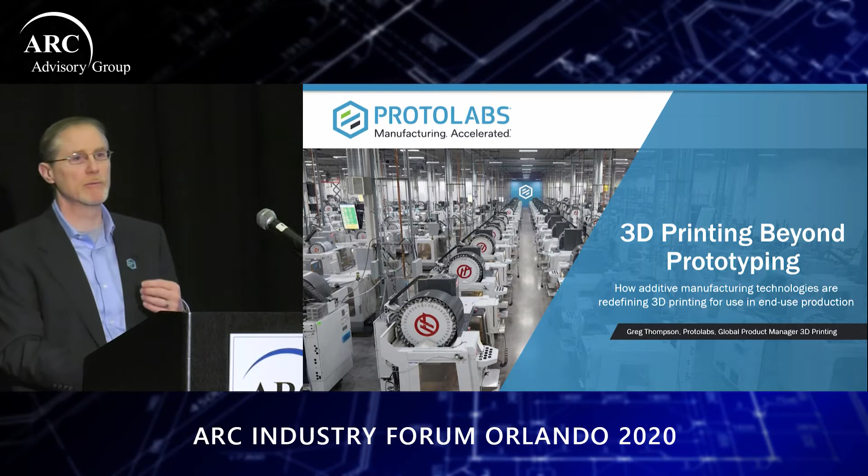We engage a lot around which manufacturing technology is best for those customers' parts and projects at the time. But I think we have to acknowledge that those decisions are not getting made in a vacuum. There are a lot of factors and trends that are impacting product development today.

First and foremost is just the sheer pace of new products and introductions that are required. The days of products generating profit as a cash cow for years to decades on end are quickly coming to an end. I would imagine, Brian, you're seeing this in the aviation industry, autos facing this. The life cycle of products is just shrinking.

And the new products that are coming in their stead are being demanded by customers to be far more personalized and far more customized. So we're getting more products that are required, and they're more complex. And those products themselves and the equipment that they're made on are more and more connected.

It has to change. It has to be more efficient. It has to be faster. It has to enable you to get your products to market much quicker, because the window of opportunity to take advantage of that revenue stream is ever shrinking.

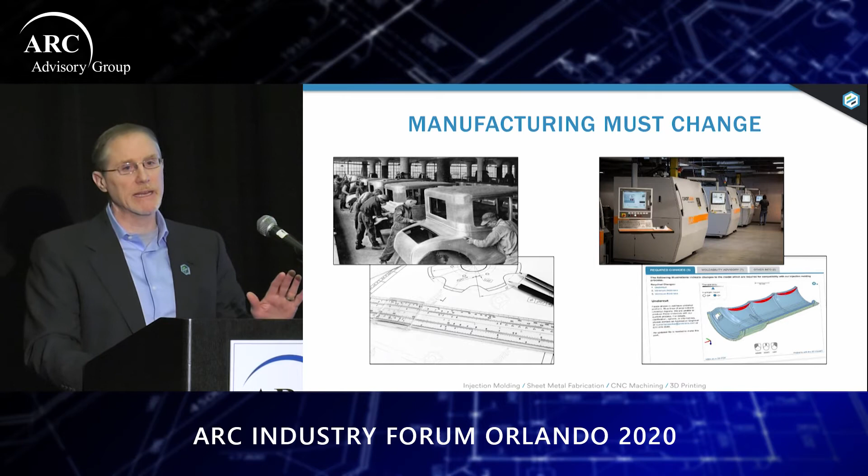And so the natural question is, well, is 3D printing, is additive ready for prime time? Is it ready for production? I think in answering that, we have to step back and talk about where additive is in its journey to industrialization. So let's start with reminding ourselves of the injection molding story.

Injection molding comes on the scene in the late 1800s. And its first materials were actually celluloid. It's used in combs, and then it evolves to records, but it remains really niche.

And then in the early 1900s, we start seeing lab-synthesized plastics. We see additives. Some of the materials that we're familiar with today, polyethylene, nylon, they come on board. And we see the first screw extrusion machine come on board. And then World War II happens, and there's a massive spike in demand.

And then from that point on, there's no looking back. By the 1980s, plastics overtakes metals, and today it's this near $300 billion behemoth that we know and work with today. And so it's important to understand that, because it took a combination of machine, material, and application to really create that tipping point.

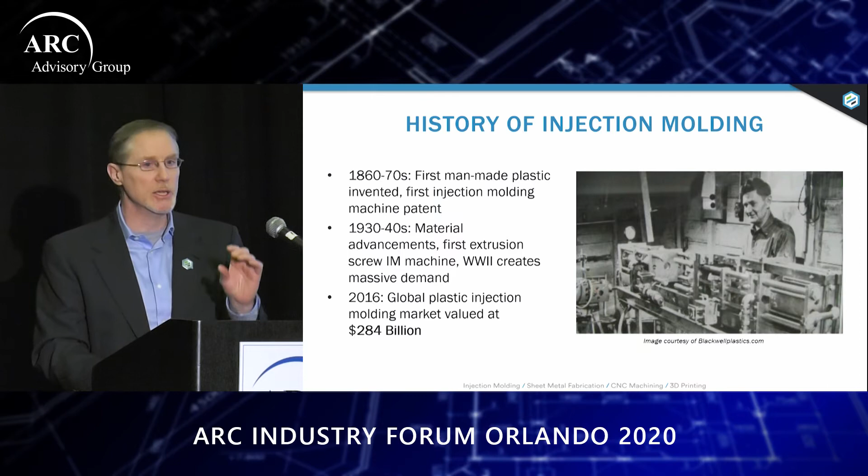And as we all know, additive is on that journey today. So, you could argue - we did some research - that the first application of a laminate-based technology we found was actually map making way back in the early 1800s. They would glue successive layers of elevation together and you get kind of a 3D representation of the topography. So that's a fun fact, okay?

But we can't even begin to talk about the industrialization of additive until the 1980s. I think both Brian and Andy referenced this - that's when the patents of all the technologies that we know today came into play. So all of FDM, stereolithography, all the systems that Will was talking about, those start in the 1980s. And they've been the bedrock of growth that have built the industry over the last 30 years.

But if you think about that, that's extremely young compared to where injection molding is and has been. Now, by no means am I arguing that it's another 20, 30, 40 years to the tipping point for additive. The world moves way too fast for that today.

The case in point, I think Andy referenced it, is early in the last decade, when the patents of FDM expire, and there's this explosion of the maker space. It did do a little bit of damage to the industry in terms of the Gartner hype cycle and how people think about it. But what it did do is drive an interest and drive a lot of engineers to explore how they could incorporate additive.

And they have. So the raw answer to, is additive viable for production? It's yes. Brian just showed you some applications. Additive is in use today. It's in airplanes, it's in homes, it's on manufacturing floors, it's in human bodies. But I think we in the industry would have to stand back and say, it's not as prevalent as it should or we would like it to be.

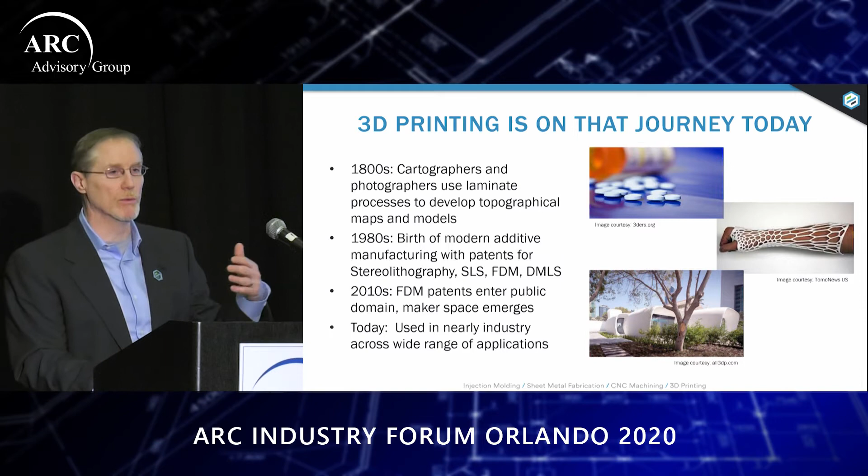That begs the question as to, well why? Let's follow the money. Because if we're talking about a choice of different manufacturing technologies to use, we're having an economic discussion, which offers the best business case and how you should think about it. A business case could either be an enhanced cost on a part-for-part basis, one has a cost advantage, or like you've seen in some of the examples before me, one technology may enable you to do something, a product, a system, or a process that you weren't able to do otherwise.

And you've seen from the case studies, and the spoiler alert, that's how you should be thinking about additive. It should be doing new and unique things for you. But let's unpack that again a little bit as to why. Let's start just with the cost structures of additive compared to some of the traditional manufacturing.

So this is a chart that's kind of shown in the additive world. I'm not sure how much in your worlds you've seen this, but if you look at this chart, along the x-axis, you start with quantity 1 on the left, and then high serial production all the way to the right, and the cost per part is the y-axis.

So let's talk about injection molding as a comparison here. What's beautiful about it is it's highly repeatable and efficient at scale. But it costs a lot of money to get into it. Once you design the part, you have to design the mold, you have to mill the mold, you have to polish the mold, you have to get it into your press, you have to set your temps and your pressures, and then and only then are you producing parts. But once you do, you're producing them at dollars or pennies per part.

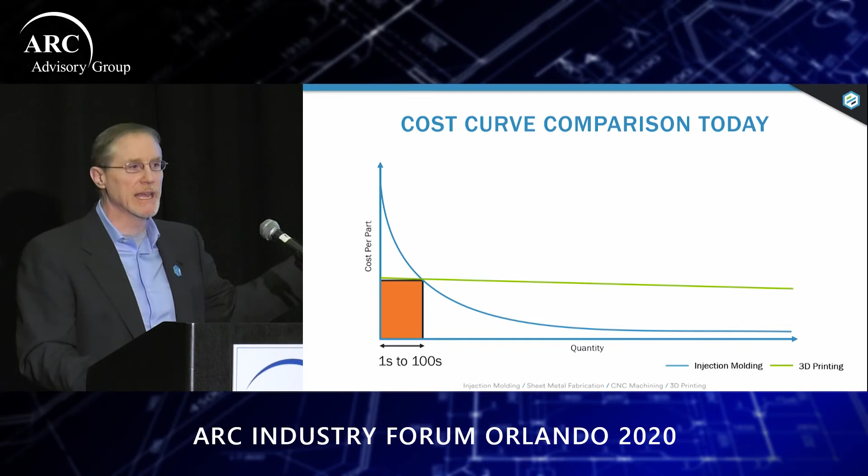So let's talk about that. Good news number 1 is ones to hundreds happens a hell of a lot in any product development life cycle. So certainly it happens in design and development, and that's where additive grew up. It grew up, it was called rapid prototyping for decades before it became additive, before it became 3D printing. So it shines there. It certainly can also shine at ones to hundreds.

And that bridge element, between your design and development, the bridge parts that are required before your first run of production, before your steel tool is up and running. Andy showed a lot of examples of ones to hundreds out on the manufacturing floor. Manufacturing engineering is another great example of ones to hundreds.

If there are any kind of supply chain interruptions, or on a lot of these new products, the demand is unknown, it can be very volatile. And certainly with obsolescence, as you're trying to manage the supply chain, oftentimes you're required to have a lifetime buy of those components. Or, if it's an aged component or an aged system that you're required to support out in the market with service and warranty, hopefully you still have the tool, and if the tool wears, you've got the drawings to recreate those parts.

So there are a lot of areas through a product life cycle where ones to hundreds, and additive can support you with really cost-saving applications. And you can enhance the part for part cost structure by better designing for the process itself. And you should absolutely do that.

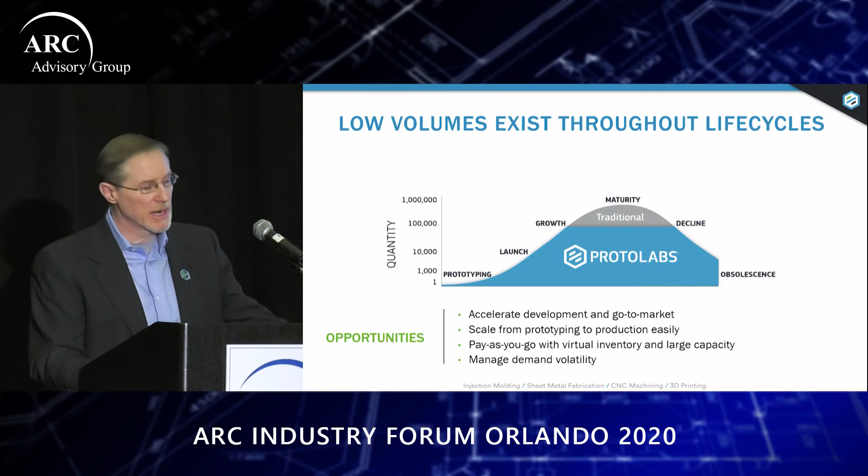But I would argue, just like the keynote that we had, you really should be moving the same way, as there are opportunities beyond a plant perspective for digital manufacturing into a fleet perspective. There are a lot of opportunities in additive moving from a part perspective to an assembly or system perspective. It unlocks two whole value streams for you.

And you've seen some of the design goals that are represented in this in the case studies previously. So the first is in your cost to manufacture. Granted, these are all over the board, so I just kind of picked a weighted average, Greg's best guess. But let's just say the parts themselves in your cost to manufacture your good represent somewhere around 35%.

You can combine different parts into a singular print and assembly, and that eliminates a lot of points of labor. It eliminates points of failure, which will translate into service costs. And don't forget about the hidden administrative cost of every SKU in your BOM. Managing POs, QA, QC, inventory, all of that costs money. So combining parts into singular components together is a significant cost savings.

That was a lot of probably what was behind the economics of some of the case studies that you saw earlier. Lightweighting and reducing just the material used. And then frankly, again, a lot more new products are coming to market. You never get them exactly right the first time. There are engineering change orders that are stacking up in the first year or two of new product development.

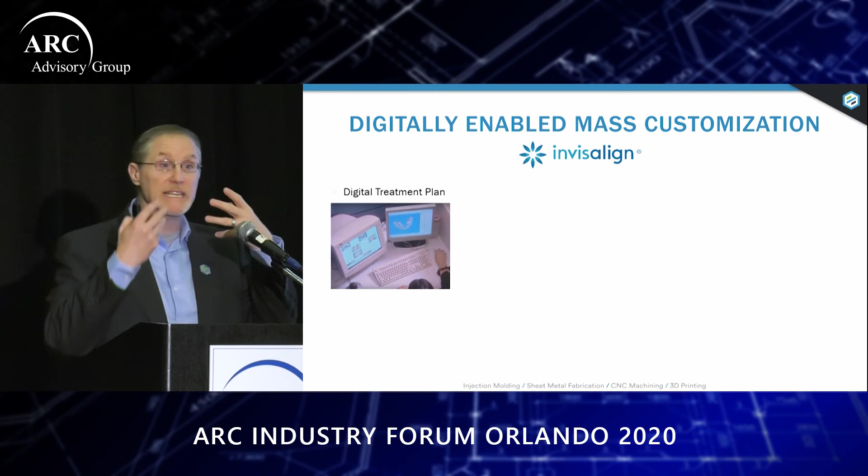It starts with a digital treatment plan—a 3D scan of the patient's teeth. Then the clinician takes the current state to the desired end state, and the iterative steps in between. So you wear an aligner for a few weeks, throw it away, put on the next aligner, and gradually—kind of like the old world of having your braces tweaked—it gets you to the ultimate end state.

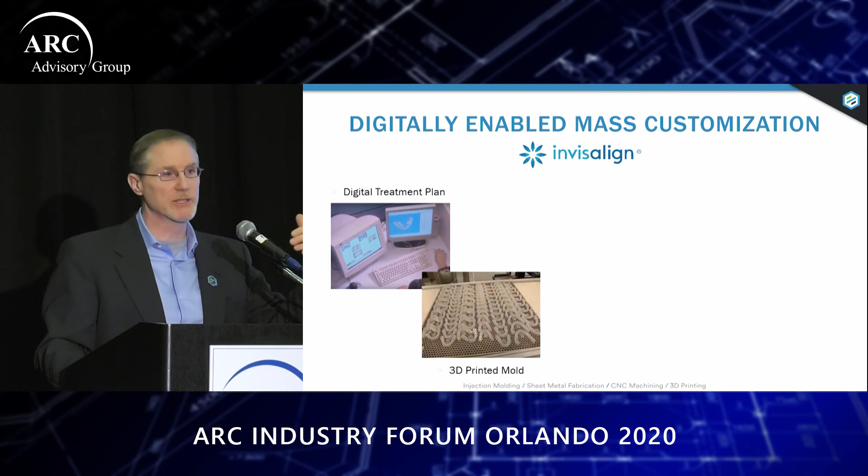Once the patient and clinician approve that plan, they push it forward into production—digitally pushed forward into production. Once in production, what they're 3D printing are the molds. They take those 3D renders of the successive steps of treatment and print a 3D printed mold.

And they're printing hundreds of thousands of these daily. And that's, believe me, that's big in its scale.

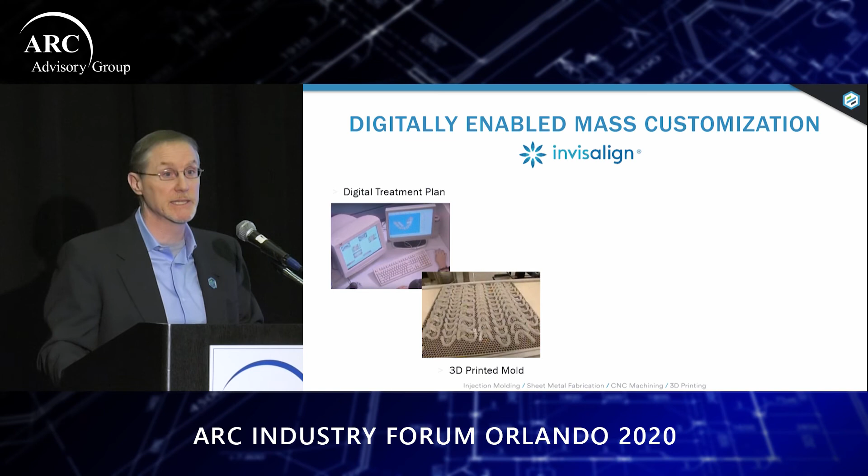But the new thing that they're doing, that 3D printing enables the full digital manufacturing, is they're printing a QR code on each of those different 3D printed molds. And when they go to overmold the biocompatible material on top of it, it reads that QR code and prints a recognition label on the biocompatible aligner itself.

So then it's molded onto a plate. When it goes into the milling and trimming steps, it reads that label and automatically pulls up the G code that enables the trimming step. And by the way, those plates are RFID enabled, so they know where any of them are in the facility at any given time. That's how they get a complete set back together in the right order and shipped out to the customer.

So that's a really cool example to me. Again, they don't just 3D print their aligners. What they use is 3D printing to enable fully digital manufacturing that enables customization, an entirely new revenue stream that wasn't available to them without that critical step of additive in between. So this is how you can think about additive enabling customization.

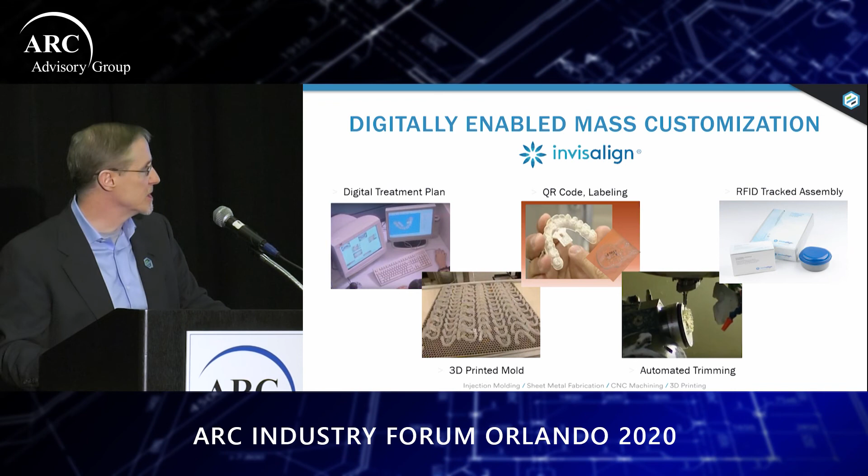And then, not present here today, but we were invited in by Velo. I'm not going to touch on this a lot because I think we've heard a lot of these examples, and we can't really talk to the case study, so I would have to speak in very general terms. But the parts we're making for our customer are very much like these - shrouded impellers, heat exchangers, manifolds. So they're very complex parts.

Anytime you're managing fluid flow, be that air, water, or coolant, you really want as organic a flow as humanly possible. And if you were going to make these historically, with traditional manufacturing, you'd have to make multiple different parts and assemble them in some way. If you were going to use conventional additive, often you're making some of these trade-offs.

So conventional additive - Brian even talked about it - you've got to deal with supports, you've got to deal with some of the orientation trade-offs. Each of those create different stress within the parts and create some challenges back and forth.

And this Velo example - this is an example of having more efficient parts printed and usable right off the printer. Velo has kind of a unique laser method that they use, and they do in situ adjustments to help manage the stress. What that allows them to do is print with low to, many times, no supports whatsoever. So rather than making any kind of orientation, support, or design trade-offs, you get the optimum design right off the printer the first time.

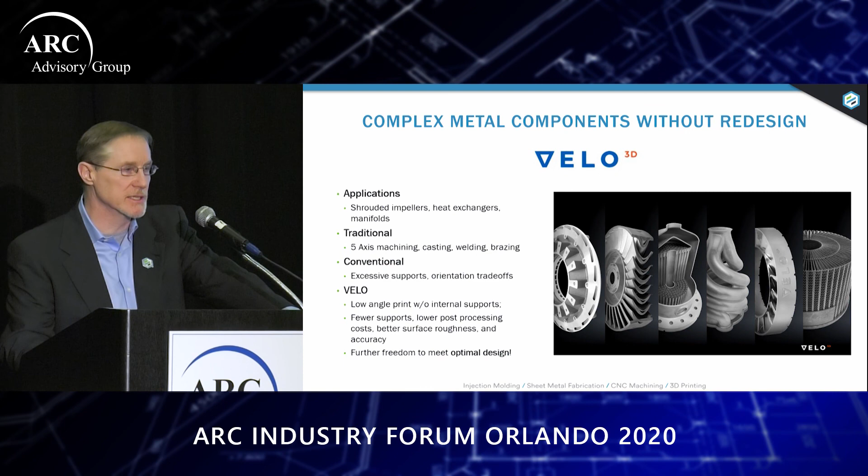And again, can't really talk to the exact case study, but I can tell you that the parts we're making for our customer can only be made on this system. And there are significant cost savings against both conventional additive and traditional manufacturing.

All right, so I'm going to wrap up here with my rules of thumb for additive and how you should be thinking about it and incorporating it into your products and manufacturing. One, it is not a replacement. There will always be a role for traditional manufacturing steps, especially at really high quantities, especially in the near term. But this is another tool for you to use - think about additive in some of those lower volume applications, be it manufacturing engineering or product development.

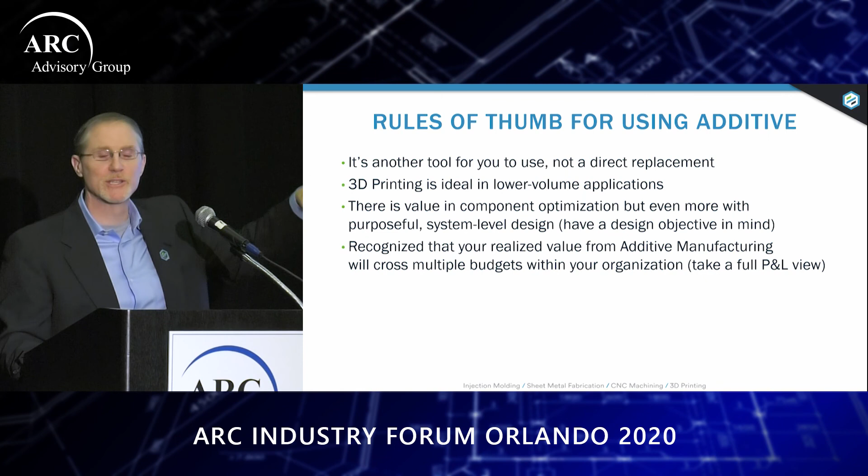Understand that there is much value to be found in system and assembly level design thinking. But with that, you have to recognize that a lot of the benefit your company is realizing will cross budgets of functions within your organization. So you have to have a P&L view. If you're looking at just your supply chain or just your engineering team, it's going to look like additive business cases are not paying out, when in fact they're generating a significant amount of value for you - they're just at different P&Ls and budgets within your organization.

All right, so if you're brand new to it and you've got the challenge of figuring out how additive can work for you, I love this quote from one of the founders of our additive business: if your parts are hard to make, where should you look? Look for parts that are hard to make today, because they're probably good candidates for additive. But if your optimum design is impossible to make any other way, that's the perfect candidate for additive.